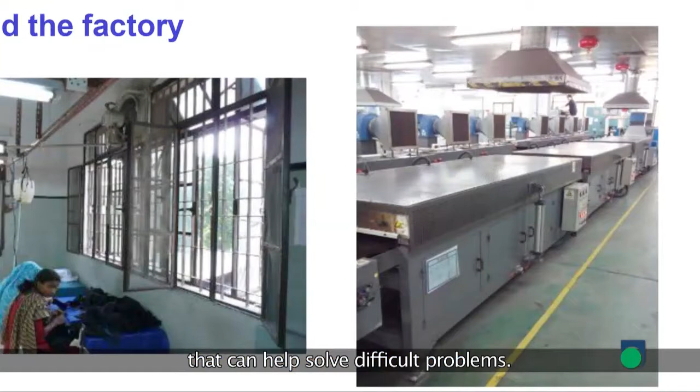The Open University of Hong Kong recently hosted an Earth Day summit. Political leaders, academics, and representatives of green groups and industries gathered to address a range of environmental challenges. In the following session, two green industry leaders presented practical solutions that can help solve difficult problems. First, engineer Chris Chong, Managing Director of Hong Kong District Cooling Company, explains how cooling buildings from a centralized source can save money and help reduce energy use and pollution.

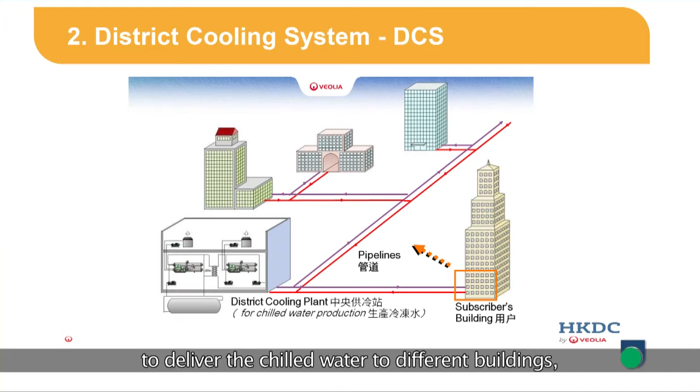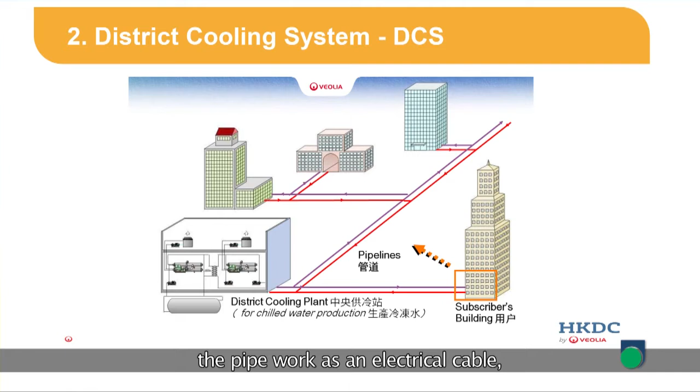So what is district cooling? It is in fact a centralized cooling plant, and then there is pipework delivering the chilled water to different buildings, and in each individual building, there is an intake room, or you call it a substation. So the concept is no different from power. If you consider the district cooling plant as a power plant, the pipework is an electrical cable, and the intake room is a transformer. It's the same. So we are basically transporting energy from one centralized plant to the individual users.

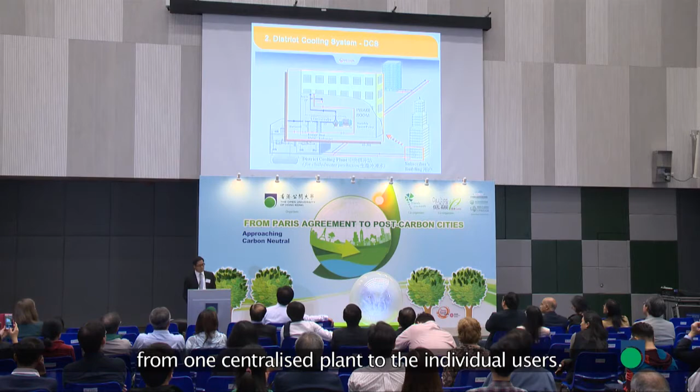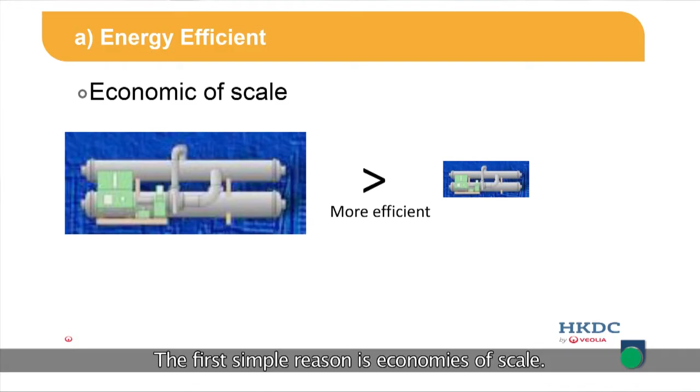So according to EMSD studies, district cooling is more efficient than fresh water cooled and also air-cooled chillers. And I'm going to explain to you why there's a saving because of centralization. The first simple reason is economies of scale. A big machine is more efficient than small machines. This is the reason why you don't have your own generator at home. You need a power plant. This is one of the major reasons.

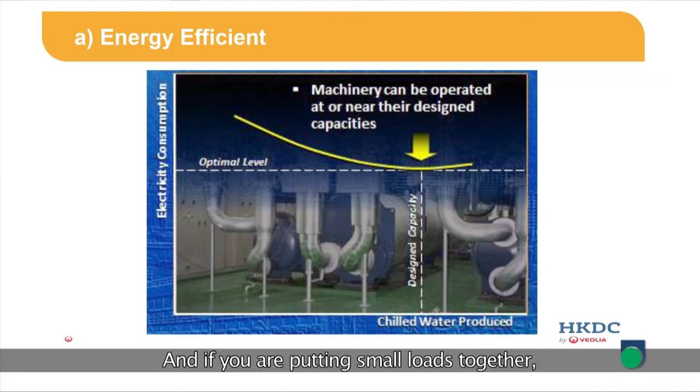And if you put small loads together, then you can operate the machines in an optimal way. If you only have one machine and one customer, you cannot manipulate the machines. But if you have more customers connected, then you can operate your machines at different loadings, and make sure they are at the optimal design capacity.

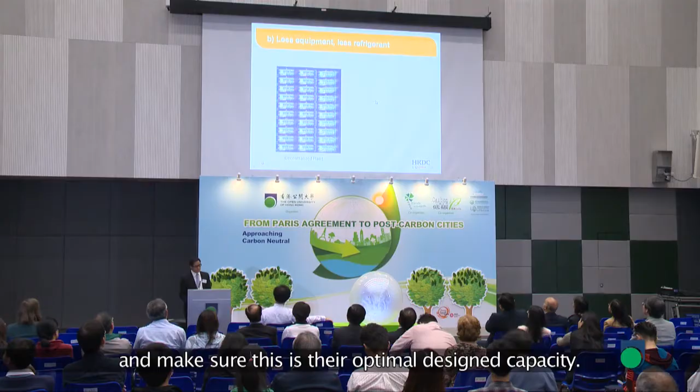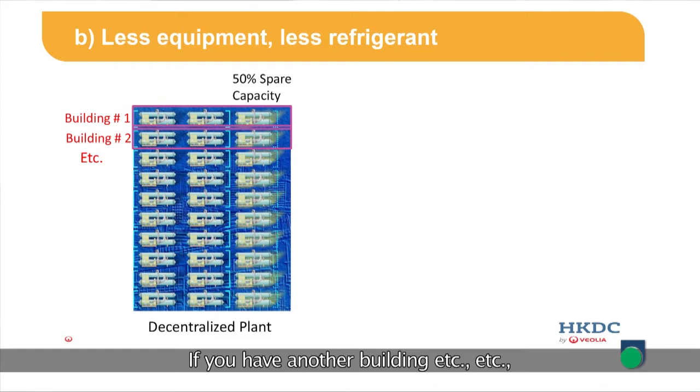Another environmental benefit concerns individual plants. For example, if you have one building, normally you have 2 units and 1 standby. You have 50% spare capacity. If you have another building, etc., that means the cumulative spare capacity is 50%. But if you have a centralized district cooling plant, I also need one standby, but that is 25%. By doing this, you can install fewer chillers. That means less refrigerant. That also helps the environment.

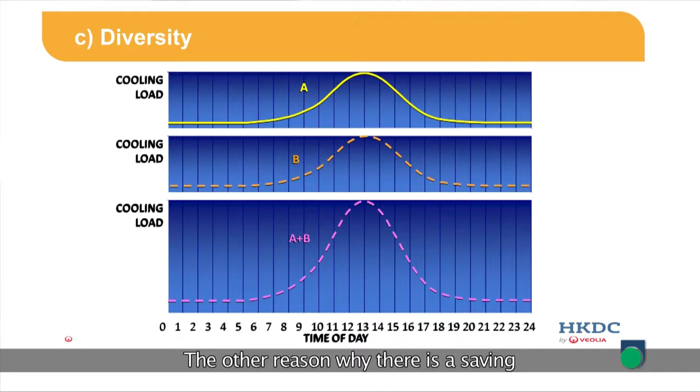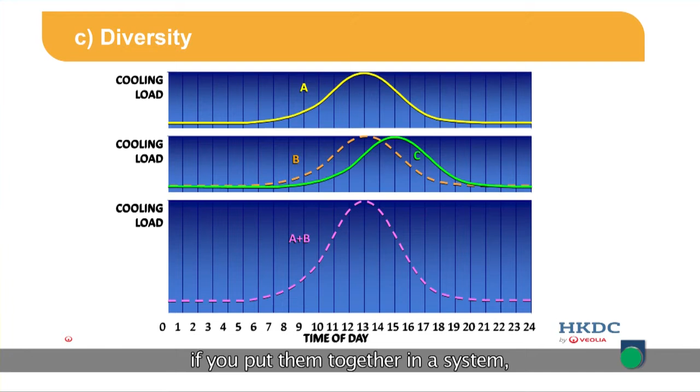The other reason why there's a saving from reduction in installation of the district cooling is if you have a building A and building B, they have the same pattern of usage. If you group it together, it will become A plus B. But if you have a building A and building C, if you put them together in a system, the cumulative loading will be A plus C. You can see the installed capacity can be less.

This is diversity. This is a common practice used in electricity. That means in the extreme case, there is say a nightclub versus an office. I can put one machine to serve both of them instead of two machines. This is an easy example to illustrate this idea.

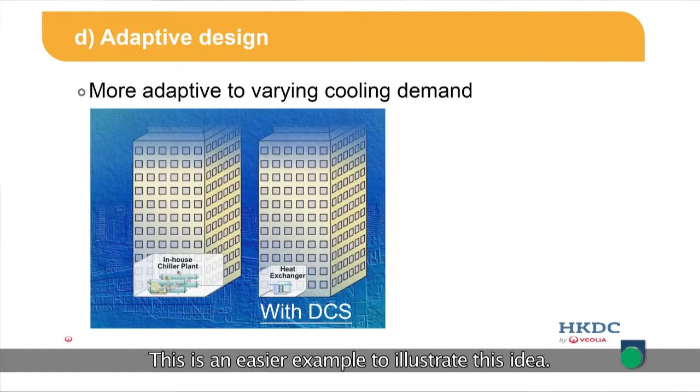The other way is district cooling. If you use this, just like electricity, if you want more loading or less loading, you just add more plates. It's more flexible. If you want more cooling or less cooling, we can just add more heat exchanger plates, then you can give more cooling to the customers.

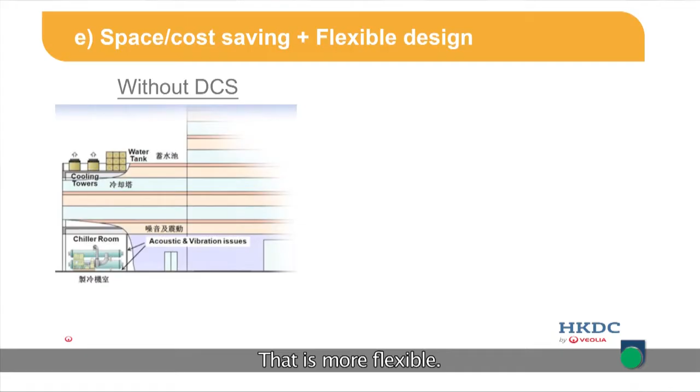That is more flexible. If you don't use district cooling, you will see you need to build your own chiller plant room. You need to build your own cooling towers. You need to build your own water tank. And there's something you cannot see, which is the electricity. 50% of the electricity in the building is used for air conditioning. You need to use the transformer house and also the switchgear room, which you cannot see here.

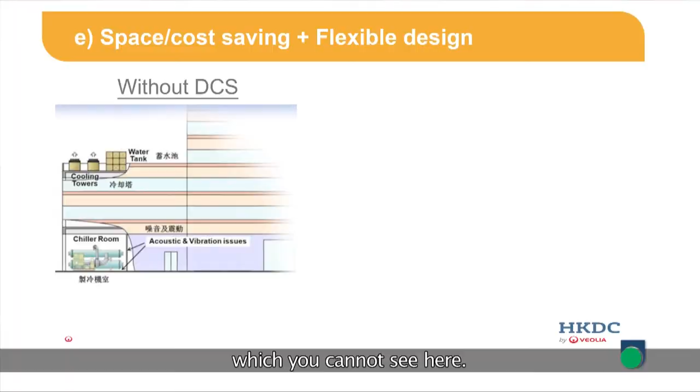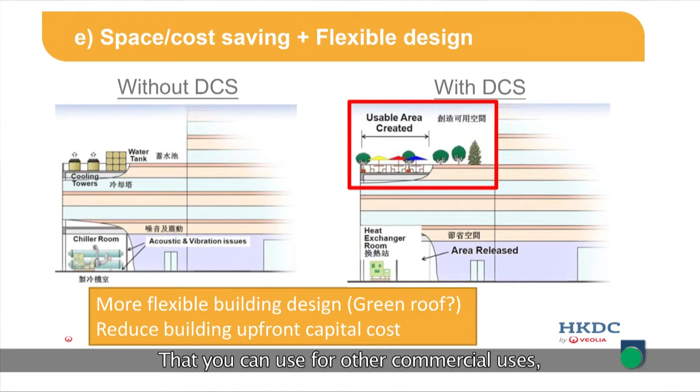But with district cooling, we only need a heat exchanger room. And for the area created, you don't need the cooling towers any more. You do not need the water tank. That you can use for other commercial use, or you can use a green roof or whatever you like. And also, you can save some area. The building can be designed in different shapes if you want.

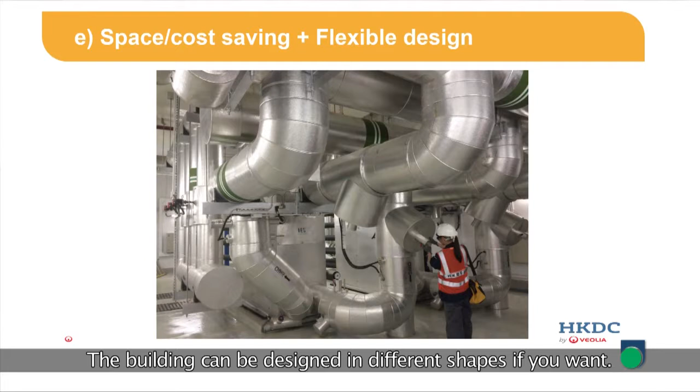This is the heat exchanger room for a 30-story building. In the past, you needed chillers, you needed a water tank, and now you only need a small substation like this, and it can serve a 30-story building.

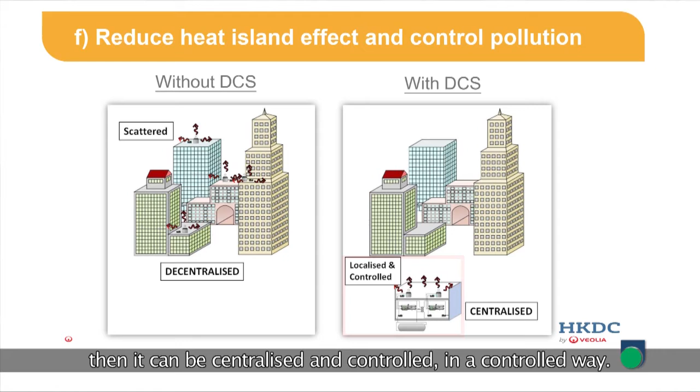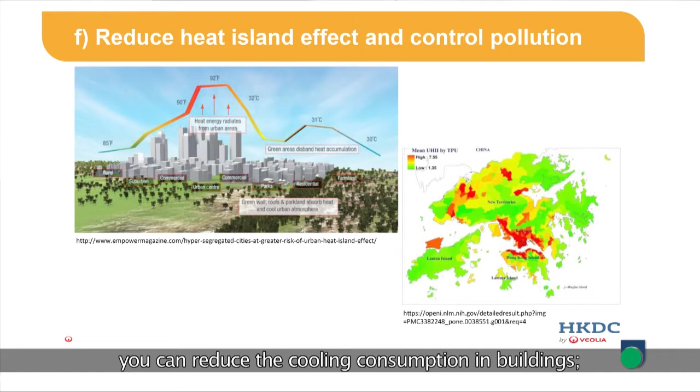Without DCS, you need to have your cooling towers, normally hosted on the rooftops of different buildings. But if you have district cooling, then it can be centralized and controlled. By doing this, it can reduce the heat island effect for the cities. As you can see, this is the case in Hong Kong. By reducing the heat island effect, it can reduce the cooling consumption in buildings. That also brings a good effect to the whole environment.

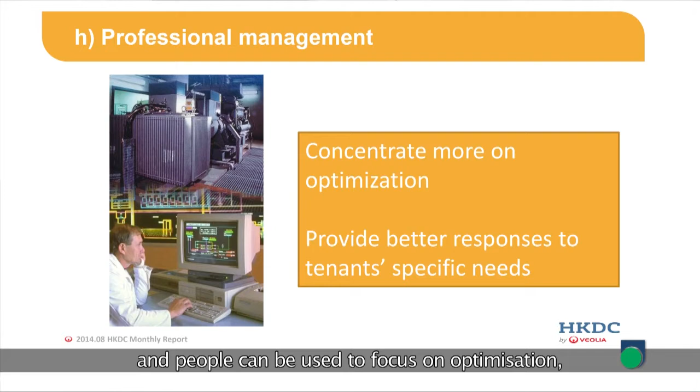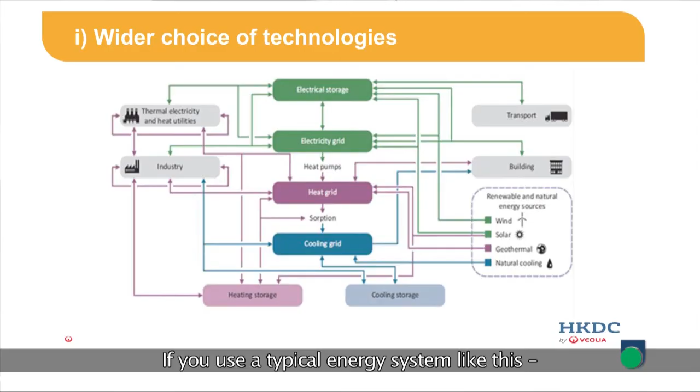And also, with a more centralized plant, you need fewer people. And people can focus on optimization, how to do it better. The coming slide, I think, for me is very interesting. Wider choice of technology. What do I mean? If you use a typical energy system like this, I will bring you through this. It looks complicated, but in fact, it is very simple.

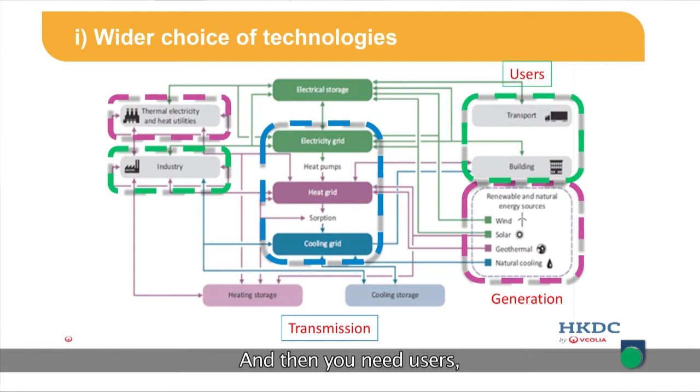You need generation, and you need a grid, like an electricity network or district cooling network or heating network. And then you need users, like transportation, buildings, and industry. And when you produce this, you can have storage. So I will explain why I bring this chart to you. I think this is an important concept of centralization. If you have only a small building, you cannot do this. But if you have a centralized grid, you can do this.

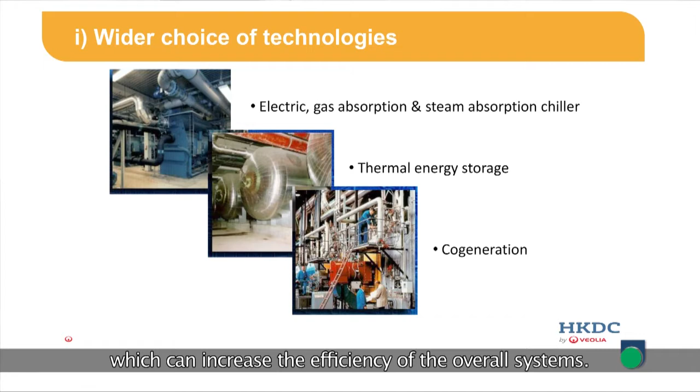In relation to cooling, for example, in your building, when you have the network, you can use different technologies like gas absorption chillers. You can use waste heat for the absorption chillers. You can use thermal energy storage. And you can use cogeneration, which can increase the efficiency of the overall system. And all this technology, you cannot do it if you have a small building. If you have the scale, you can employ all these technologies.

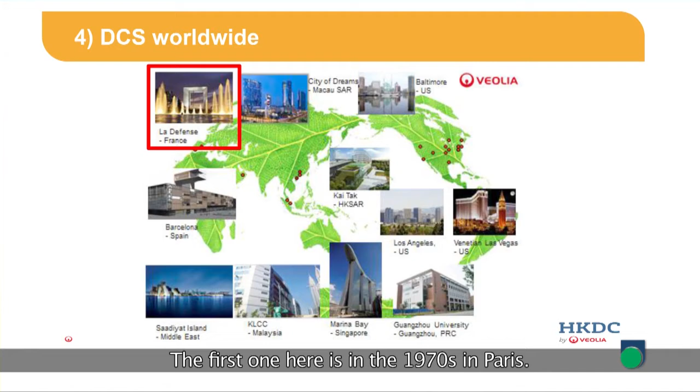What are the DCS worldwide? So Veolia has a lot of district cooling. We are the largest district cooling company in the world, and also in the US. There are a lot of different cases already done for district cooling. And the first one here is 1970s in Paris. There was district cooling already. So it is not new technology. It has been there for 40, 50 years.

So the project I work on is Kai Tak, the first public district cooling in Hong Kong. When this is fully built, it's 80,000 RT. What is the concept of that? A grade A building requires 3,000. Now it's 80,000. That means about 30 buildings, 30 grade A buildings, we can supply.

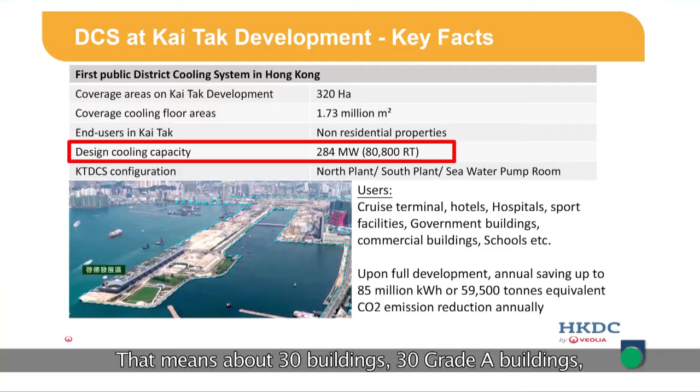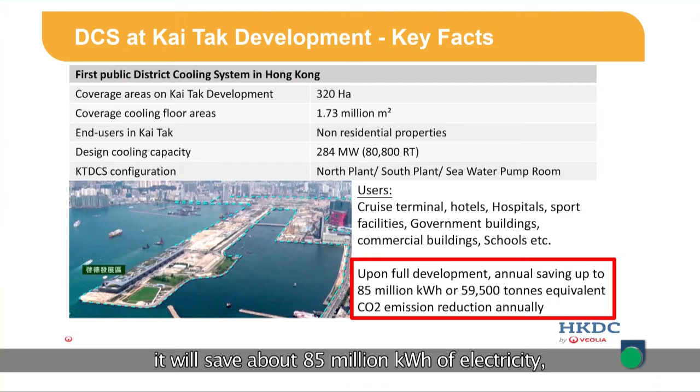And from the government studies, you can see we will have different types of users: cruise terminal, hotels, hospitals, government buildings, commercial malls. When fully done, it will save about 85 million kilowatt-hours of electricity, based on the reasons that I explained before. The project has been completed in phases. We have 2 plants, one north and one south. Some of the users are already using us, like the cruise terminal and also the T1 tower.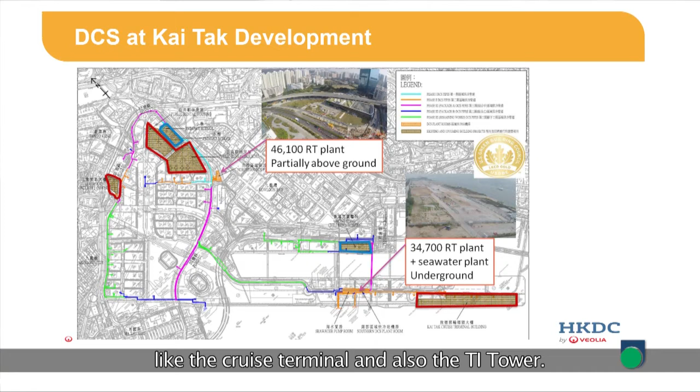One characteristic of this project is it uses seawater. Seawater has a lower temperature. If the condensing temperature is lower, the efficiency of the system is higher. And this is one of the good reasons that the government wants to use district cooling using seawater. And this technology is difficult to use if you have individual buildings.

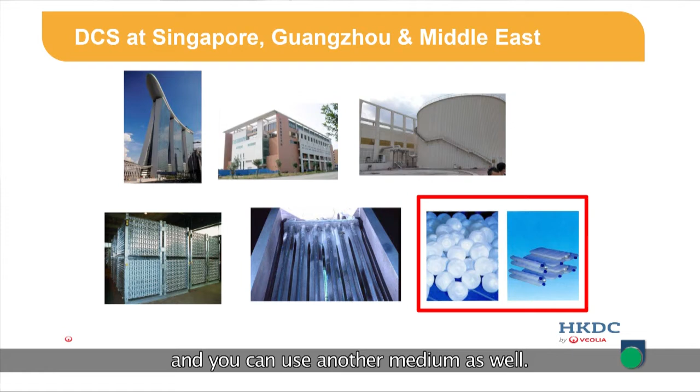Let's take a look at other places like Singapore, Guangzhou, or the Middle East. You can see there is big ice storage inside, and this is a chilled water tank. This is some kind of ice for the ice storage, and you can use other media as well. In this project, they use ice or cold water. And why do they do this? This is quite controversial, but I will bring you through this.

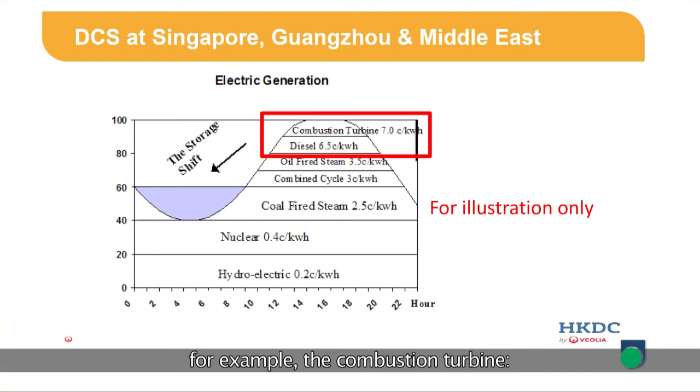This axis is the hours, and this is the percentage of the electricity loading. I'm from the power industry. When I was young, normally they used nuclear or hydro as a base load. When there is more electricity consumption, they put less efficient machines to serve the peak. For example, diesel. For example, the combustion turbine. The efficiency is lower, the cost is higher.

So for cooling in a typical building, this is also the hours. Normally we turn it on during the afternoon hours or the office hours. If we can find a way to move the cooling peak to nighttime, I think this is the reason for using ice storage. And why we do this in China, for example: in China, the nighttime tariff is only about 1/3, 30% of the daytime. I think the government also gives incentives for industry to move their afternoon peak to nighttime.

This is one effective way because cooling is a big user during office hours. And by doing this, they can depend less on the less efficient generation machines. And also, because you have storage of cooling, in case there's no electricity, you can still have some cooling because you have ice. That is a very important concept. If you look at it from the city's perspective, it can reduce or defer power infrastructure development.

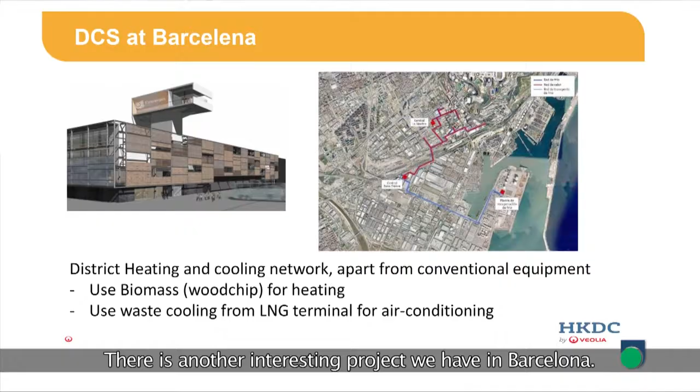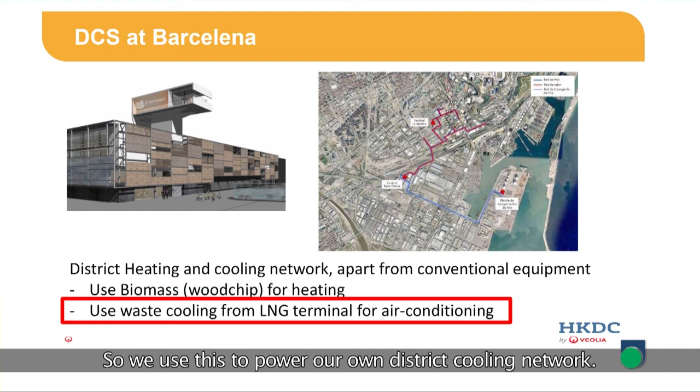There's another interesting project we have in Barcelona. This is a district heating and cooling plant. For the heating, they use wood chips for producing heating for the customers during winter. What's really interesting is they use the cooling from the LNG terminal. You know LNG is minus 165 degrees. When they regasify it, there is a lot of free cooling. In this project, we use the free cooling from the LNG. If we don't use it, it will be dumped in the sea anyway. So we use this to power our own district cooling network.

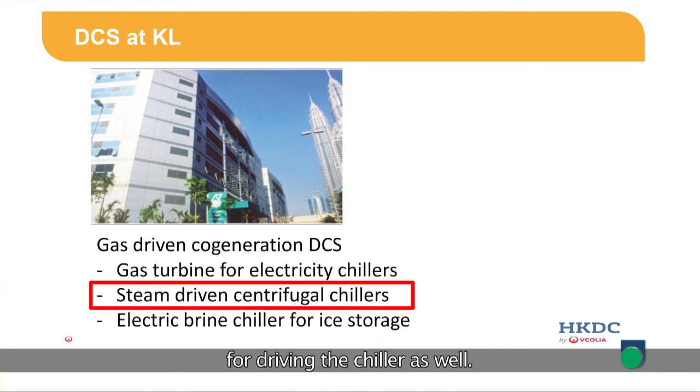And there's another interesting project we have in Kuala Lumpur. It's a gas project. It uses a gas turbine to produce electricity to drive the electric chillers. And they use the waste steam for driving chillers as well. They use steam-driven centrifugal chillers. They don't use motors; they use the waste steam to drive the centrifugal chillers. And if you know electricity well, a gas turbine needs a stable load. That means at nighttime, when consumption is not high, we use the electricity to produce ice. That makes the system more efficient.

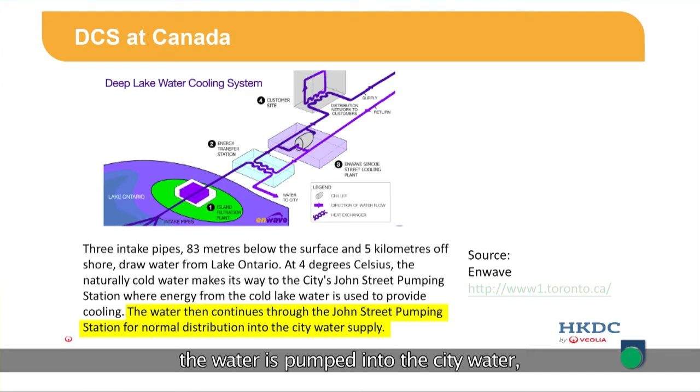The interesting point I would like to highlight is, after this process, the water is pumped into the city water supply. So it's not waste. You pump the water anyway and take the cool to power the whole city. I think this is a very good idea.

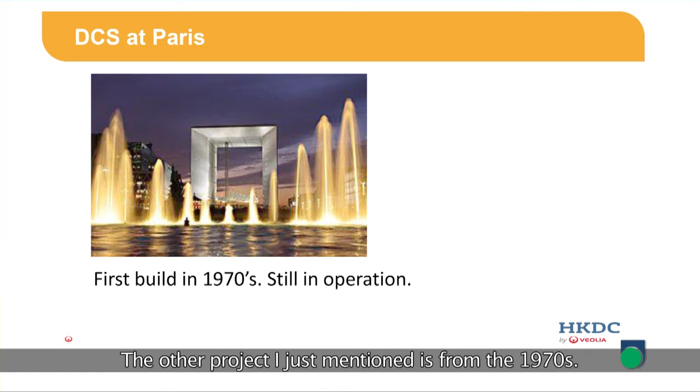The other project I just mentioned is from the 1970s. It has been built for a long time, so it's a very proven district cooling system in the world.

After saying all this good thing about district cooling, I need to caution a bit. When we build district cooling, we need to think about the tunnel, the planning of the pipework. That needs to be done carefully.

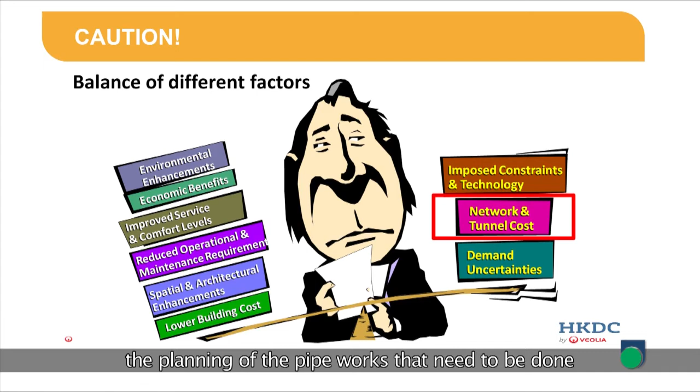Apart from that, demand uncertainty is something we need to think about, because we are an infrastructure company. If we build it and there are no users, we will lose a lot of money. We need to make sure it makes economic sense, otherwise it will scare off investors.

As a conclusion, after saying all this about district energy and district cooling, this idea is confirmed by the United Nations Environmental Program. They issued a book called District Energy in Cities: Unlocking the Potential of Energy Efficiency and Renewables. It states that a district energy system is the best practice approach for providing a local, affordable, and low-carbon energy supply.

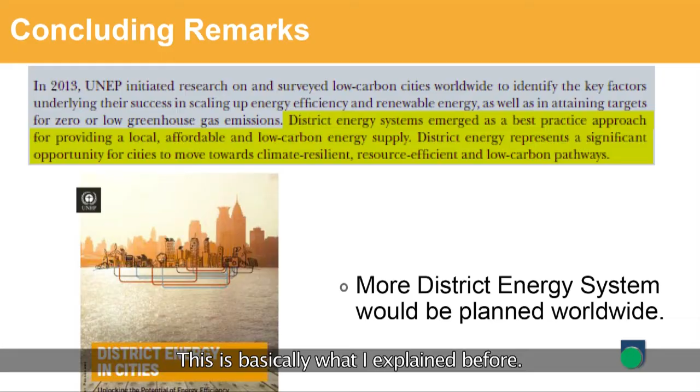District energy represents a significant opportunity for cities to move towards a climate resilient, resource efficient, and low-carbon pathway. That's basically what I explained before. I think it's a good concluding remark for my talk.

Last but not least, I want to say again, the green economy will be an economy of innovation. We need your help to reduce the carbon footprint. So this is the end of my presentation. Thank you.

In the second presentation, Professor Engineer Steve Wong, Managing Director of Billion Group Technologies, recounts some of his experiences with improving industrial design in ways that cut energy usage by startling amounts.

First of all, thank you very much for the invitation by Professor Casey Ho and the organizers, so that I have the opportunity to share my humble experience in energy efficiency improvement and also waste-to-energy experience over the last 2 decades in Hong Kong, China, Asia, and also Germany and Europe. I would focus on 2 things: energy efficiency and waste to energy.

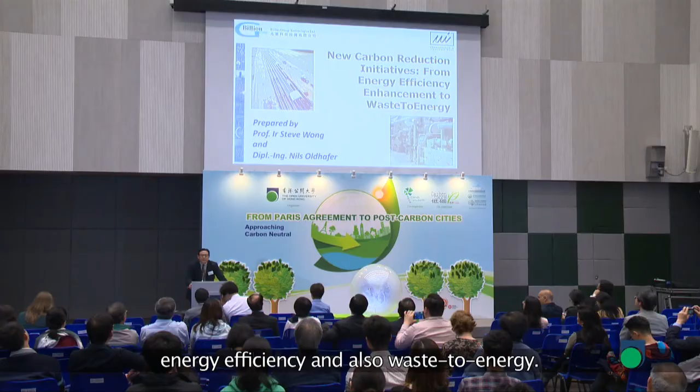Before I start sharing my experience, let me ask you one question. When we always talk about carbon emission, we always compare the current carbon emission or greenhouse gas emission to the pre-industrialization level, am I correct? Why do we always compare carbon emission to pre-industrialization? The answer is, we think all the carbon emission is coming from industrialization, am I correct?

Then I ask one question further: why does industrialization cause so much carbon emission? We know the answer - carbon emission is caused by industrialization. But why does industrialization cause so much carbon emission? The answer is low energy efficiency.

I'm not talking about theory, I'm talking about my actual experience over the last 2-3 decades. I've been helping a lot of industries - injection molding, electroplating, metal stamping, cement, asphalt, electronics, toys, dyeing, whatever you name it. I've been working in the last 2 decades for various industries in Hong Kong, China, and the Asia region. Out of this analysis, we found that most manufacturing facilities' efficiency is extremely low.

If you ask me, 'Hey Steve, what is your summary of those industries when they have employed your expertise to improve energy efficiency, what energy saving could be achieved?' From my last 20 years of experience, after my assistance with the manufacturing process, on average, the energy consumption could be reduced by 50% or even higher.

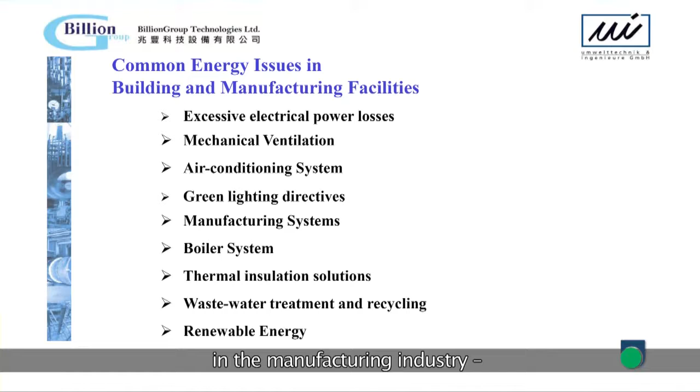I will share some of my experience in the specific areas where most industries have been wasting energy: electrical power losses, mechanical ventilation and air conditioning systems, lighting solutions, mainly in manufacturing systems. Particularly in China, I think most energy is being consumed in manufacturing industry - boiler systems, thermal insulation systems, wastewater treatment, and renewable energy.

For example, I'll give you some information. Hydropower is a green energy, right? If total hydropower is 1 unit, do you know how many units are available for solar power? For renewable energy, we have wind energy, biogas, whatever, but the most available renewable energy among all is solar. Comparing the magnitude, if 1 unit is from hydropower, how many units are available from solar?

Anybody know the answer? The answer is 2,850, according to the global survey. Therefore, the most abundant and available renewable energy on earth is solar energy. This is why we should make use of solar energy.

Maybe I can highlight some of my experience regarding the shortcomings coming from the industry in the last two decades.

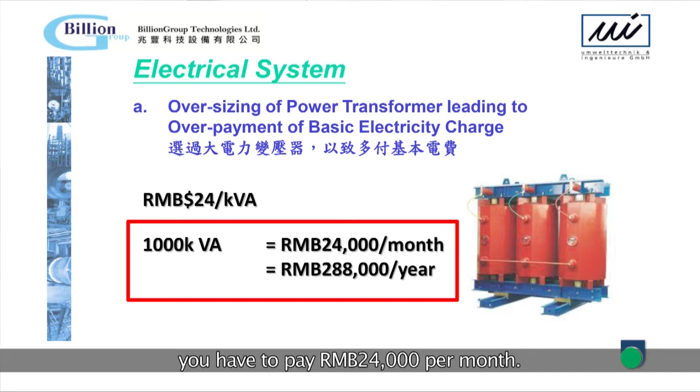On the electrical system, a lot of factories are over-providing the supply capacity in their factory. Financially, they spend too much money because when you install a transformer, no matter whether you use it or not, installing a transformer around 1,000 kVA costs around 24,000 RMB per month, which is almost 300,000 every year. Therefore, I've seen that a lot of factories over-provide the power capacity at their sites.

That's number one. The second thing is that even though you idle this power supply in the factory, it's still consuming energy, because it will consume hysteresis loss in the core of the transformer. This is why we always advise our clients not to overbuild the power supply system in their factory, particularly as in the coming years, when we apply energy efficiency improvements across various energy systems, overall energy consumption will come down drastically.

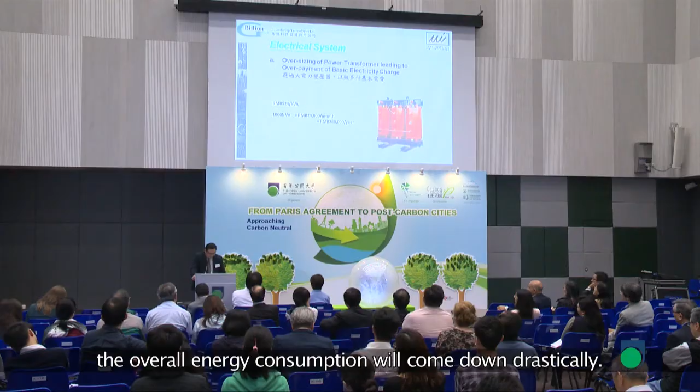Then for the electrical system, a lot of loss is consumed in power distribution. I had a factory ask me to be their consultant in Dongguan. In one single year, we helped them save energy worth around 30 million RMB. You can imagine how much energy they had wasted. One of the most significant wastes is in power distribution, not outside the factory, but inside the factory.

Because they only installed the capacitor at the main board. Installing a capacitor at the main board is good for power distribution, but only from the perspective of the supply company. There's no internal benefit. Therefore, once the client adopted my advice to install power factor correction at the load center, they could immediately save a lot of energy running from the main board to the load center.

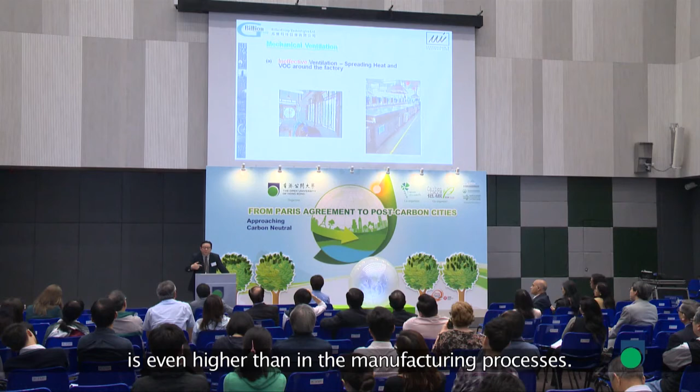In most industries, they install mechanical ventilation. In the mind of most factory owners, a ventilation fan is just small power, so just let it run. But in reality, in some factories and workshops, I found that the energy consumed by the ventilation system is even higher than that of the manufacturing processes. That's the fact. Therefore, after refining the ventilation design, a lot of energy consumption has been saved.

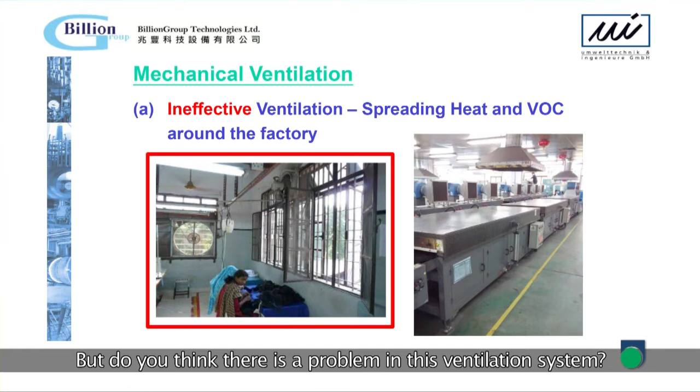On the left-hand side, this picture is of a very famous factory in Bangladesh. I help a lot of factories in Bangladesh. Before my help, I found that they were running a lot of ventilation fans. But do you think there's a problem in this ventilation system, or is this system good? What's the reason? Short circuit.

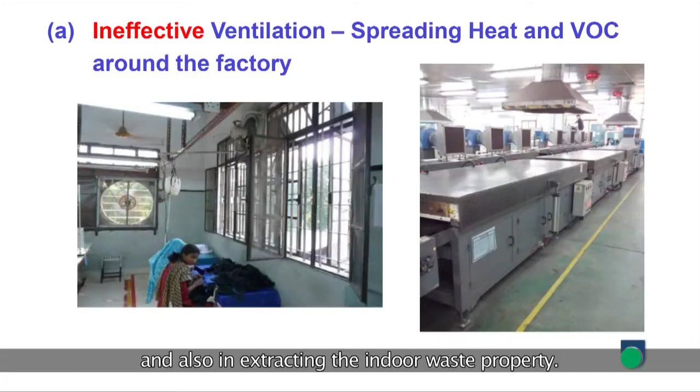This factory owner is quite generous in using money and energy running ventilation fans. But once the window is open, actually all the air comes up from the window directly to the outside. There's no effect in cooling down the indoor temperature, or in extracting the indoor waste heat. Therefore, after a good redesign, the whole system improved and energy consumption was drastically reduced.

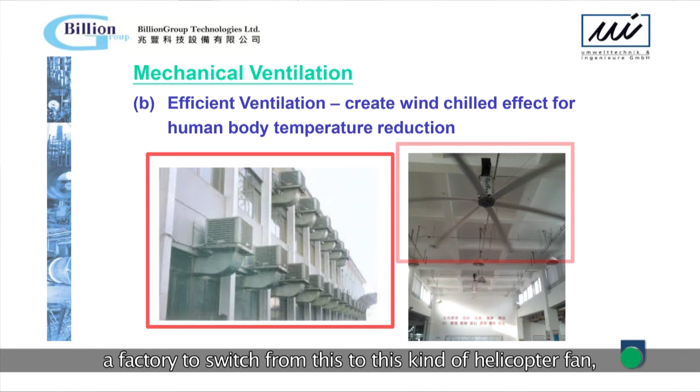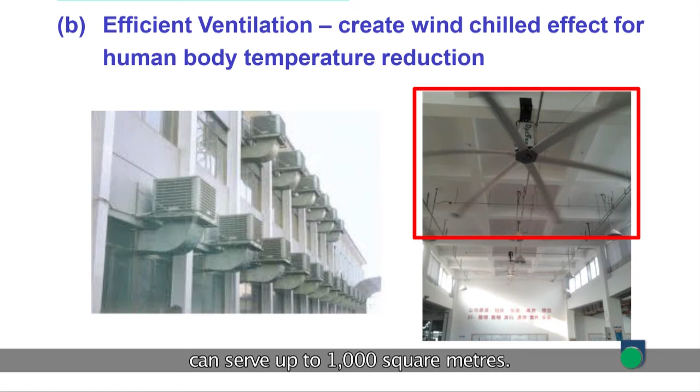50% is not an extravagant figure. In China or in Asia, a lot of this kind of evaporative cooler has been used. But nowadays I highly recommend factories switch from this to this kind of helicopter fan, because an evaporative cooler consumes around 1 to 2 kilowatts of power, but the area it serves is quite limited, only around 1,000 square feet or less. This kind of helicopter fan can serve up to 1,000 square meters, and the power consumption at the optimum running condition is only 1.5 kilowatts - we actually measured the consumption. Therefore, we can drastically reduce the power consumption in ventilation by over 50%.

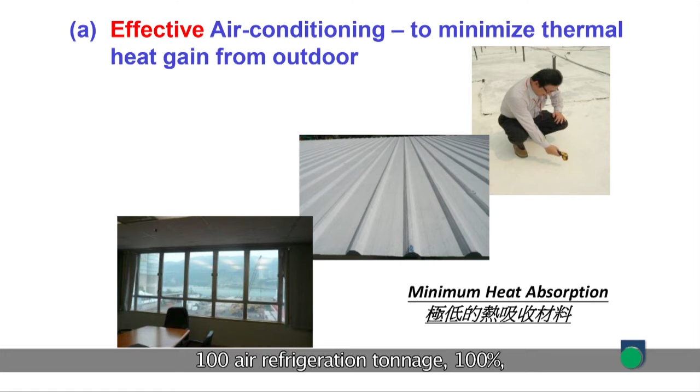In air conditioning, from my humble experience, most of the saving in air conditioning is not in the air conditioning system itself, but in the building envelope. For example, for a building with a cooling load of around 100 refrigerant tons, taking that as 100%, you can guess how many percent is for catering to internal people, and how many percent is for catering to external heat gain.

Maybe I'll ask this question in a way: is the majority of cooling load for cooling down internal heat gain, or for cooling down external heat gain coming into the building? External - raise up your hand. Exactly right. I can share with you that sometimes up to 80% of the refrigerant loading is running to cool down the heat gain from the outside.

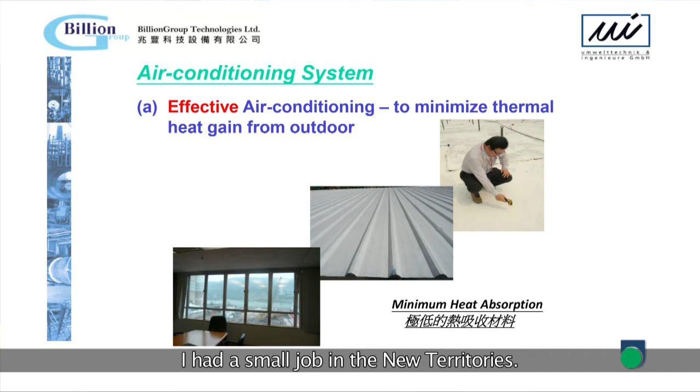I had a small job in the New Territories. After improving the thermal treatment for the building envelope, for the air conditioning systems, we could switch down 3 units - only 1 unit running. We saved 3 units. You can imagine how much energy was wasted before the retrofit. Therefore, starting from now, in order to increase energy efficiency and maximize the usage of our energy, we have to bear in mind looking at the building envelope of our premises, and try to eliminate or avoid any energy wastage in cooling down the external loading.

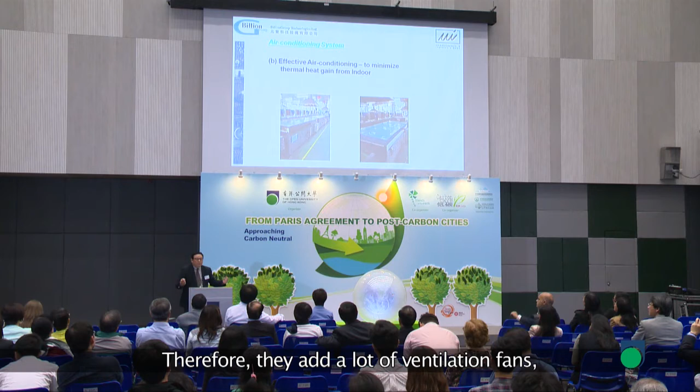In some manufacturing systems, a lot of bad design exists where the indoor temperature is very hot. The owner of the factory is good-hearted and passionate about the workers, so they add a lot of ventilation fans here and there. For example, the heat source is right here, and they install a lot of fans in the perimeter of the building so they can expel the heat out to the outdoor atmosphere. Is this a good exercise?

No. One thing is that the heat source is right here, and if we install the fan over there, we are trying to move the heat and spread it around the whole factory - that's point number one. The second point is that normally during manufacturing processes, apart from heat, what do you produce? Pollutants - VOCs, am I correct? If you install such a system at that location, you are pushing the pollutants from here all around the factory, and all the workers inside are being exposed to dangerous pollutants or dangerous material. Therefore, it is not a good design.

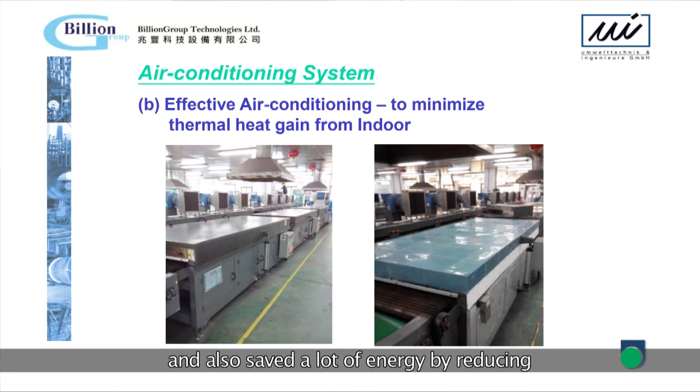The best design is that when you create pollution at the source, you have to remove the pollution right at the source - am I correct? This is the right solution. After using this kind of approach, we have helped a lot of factories improve indoor air quality and also save a lot of energy by reducing and shutting down all these perimeter ventilation fans.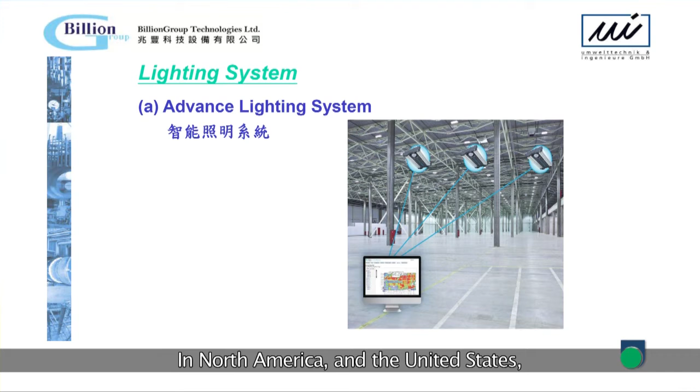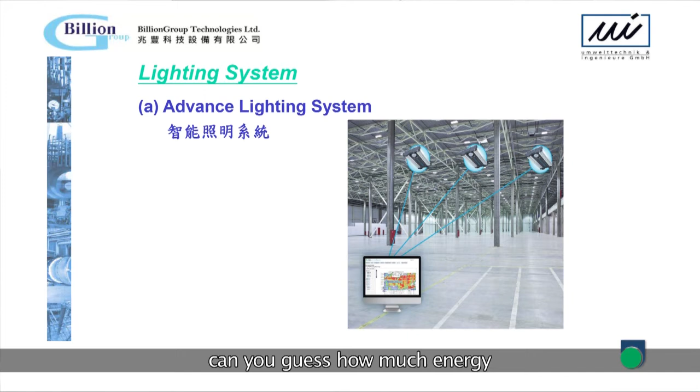Lighting systems normally constitute around 10% of the total consumption in a factory. In North America, the United States, and Europe, over the past 5-6 years our team has helped a lot of big factories reduce energy consumption in lighting systems, including Coca-Cola, Pepsi, Kellogg, and others. After using the latest advanced lighting system, how much energy do you guess we can save? 10%? 50%? 90%? 95% maximum, on average 90%.

Therefore, I think we have to look at whether we are wasting energy in the lighting system. Apart from light source - T8 to T5, T5 to LED - there's only one element in energy saving for lighting, which is the light source. But in reality, a lot of simple things can be used to reduce energy consumption in lighting.

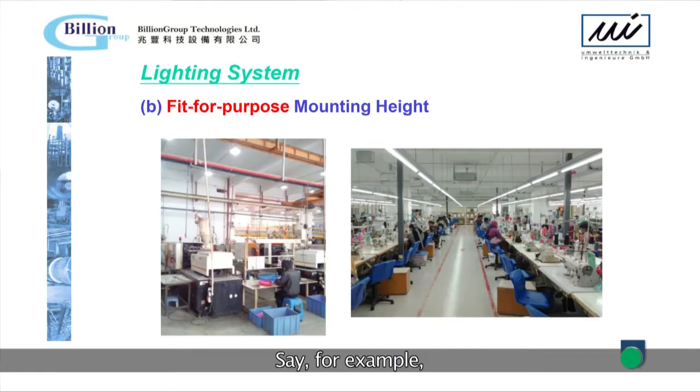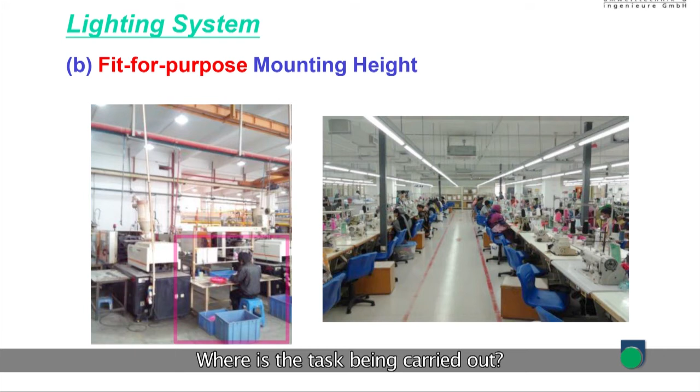For example, in this factory the lighting is at the ceiling of the plant room. But where is the task location, where the task is being carried out? Down on the floor, am I correct? If you put the lighting on the top floor, you will waste a lot - even though the lux level there will be 1,000, down on the floor it's only 50. Therefore, you're wasting a lot of energy illuminating the area beyond the task area. Back to this picture, all the lighting was at the ceiling, but after my redesign of the system, they put all the lighting just on top of the sewing machines. By doing so, you could save more than 50% of the energy.

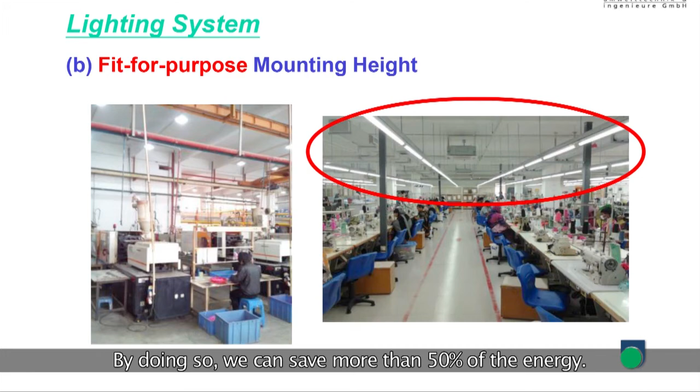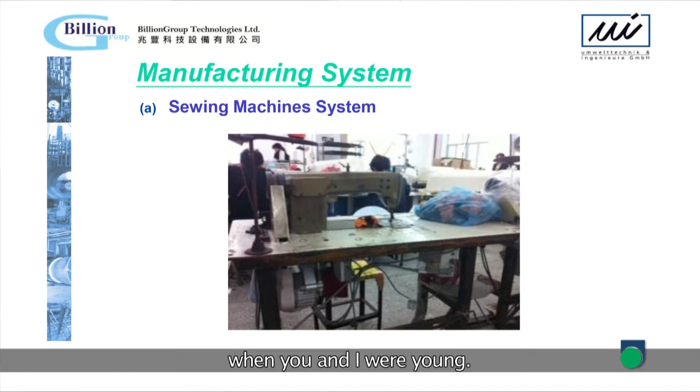For manufacturing systems, we've done a lot of examples like this. For sewing machines - I think you remember these sewing machines from when you and I were young - they're still being used in some countries, particularly developing countries. After improving the sewing machine's efficiency, we could also save 60% in energy for the sewing machine. Then after applying energy efficiency measures, the overall saving could be over 50%.

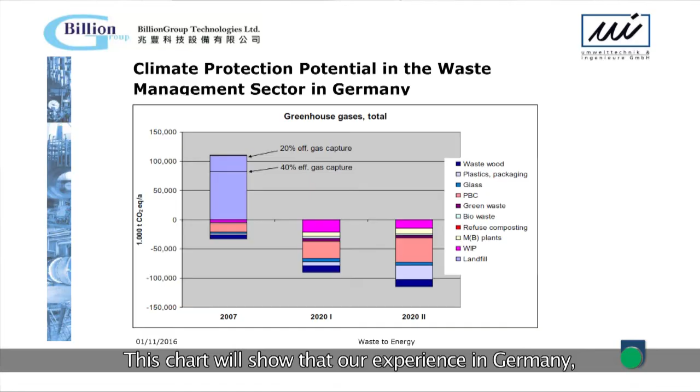Then talking about switching to waste treatment - this chart shows our experience in Germany after adopting proper waste treatment, where the total CO2 emission, the carbon emission, can actually be reduced.

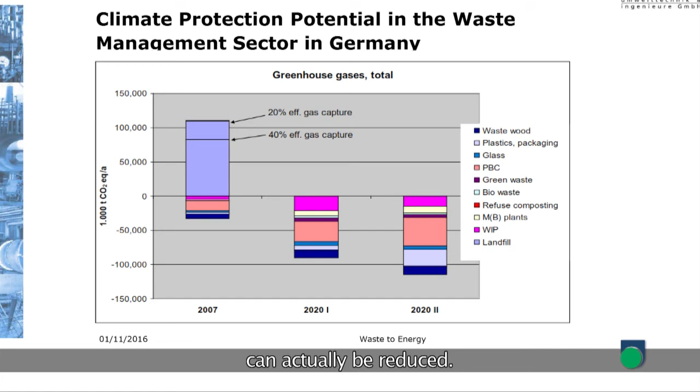In China, there are around 660 cities at the moment. How many cities are being surrounded by garbage, municipal solid waste? Do you know the number? The answer is 440.

440 cities being surrounded by garbage, municipal solid waste. This waste has generated a lot of pollution in air and water, deteriorating the health of the people. Therefore, we have an imminent need to solve this waste problem in China. This problem is not unique to China, but also affects most developing countries in Asia.

I'll introduce a concept because in China, they do have waste-to-energy plants, but the problem is they directly fire the waste into steam. Bear in mind, most of the waste in China has very high water content. Do you know how high? In monsoon season, up to 80% moisture content. Normally also 70%. If you fire this waste in an incineration plant, you're actually firing water.

The energy efficiency is very low. Once you fire this waste, the temperature of the burner will be around below 1,000 degrees Celsius. If that happens, one significant drawback is the generation of dioxin.

In Germany, starting from 2005, the EU and Germany had to follow the EU legislation that no untreated waste can be dumped into landfill sites. Since 2005, no untreated waste could be dumped into landfill sites. That means all waste must be treated well before the landfill site.

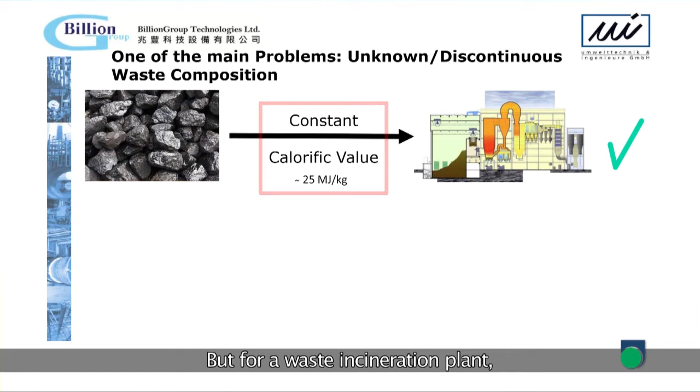But for a waste incineration plant, the value is not constant across different timelines in a year. Like Chinese New Year, Easter holiday, summer or winter time, the composition of the waste is different. Therefore, the calorific value of the waste is different. How you build a waste incineration plant to cater for different C values is extremely difficult, and the efficiency will be very low.

One more important point: in designing a waste-to-energy plant, are you running it for 1 year, 2 years, or 3 years? Of course not. It must be running for the coming 25 years or even longer.

Am I correct? But in that case, bear in mind the demographics of the city and the economic situation of a city will change. That means the economy will change the city's behavior. In that case, the composition of the waste of a city will also change, and the C value will continue changing. How do you design a plant to cater for all these changes?

Therefore, if you strictly design a plant just mainly for waste-to-energy, the plant will come out with very low efficiency. That's what we have seen in China right now.

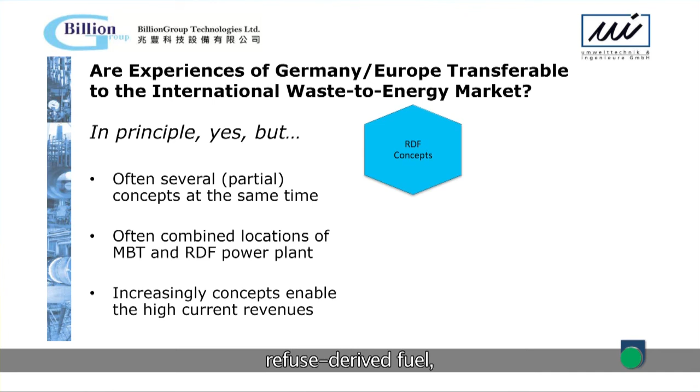How to tackle this problem is that we can apply a treatment called MBT to change this waste into a green fuel called RDF, refuse-derived fuel, in such a way that this RDF can have a very high heat value, C value, up to 12 megajoules per kg. That's proven. And this RDF also can have a lot of applications.

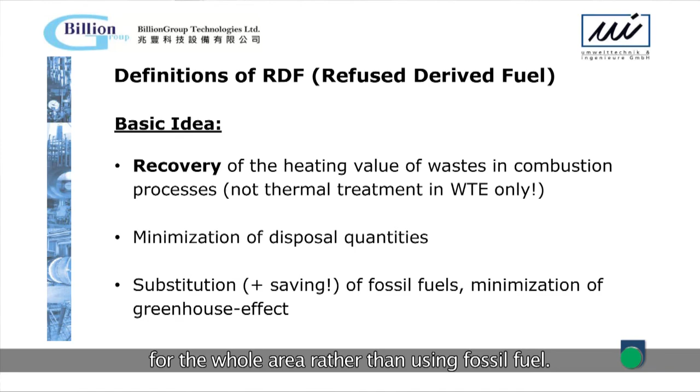In Germany, we always build the RDF plant next to the paper mill or industry. Therefore, we can directly use the heat generated to feed the industrial process. Then you can save a lot of energy.

These are the CO2 emission reductions through using RDF. You can compare brown coal, hard coal, oil, natural gas, and RDF. You can see that the CO2 emission is lowest from RDF.

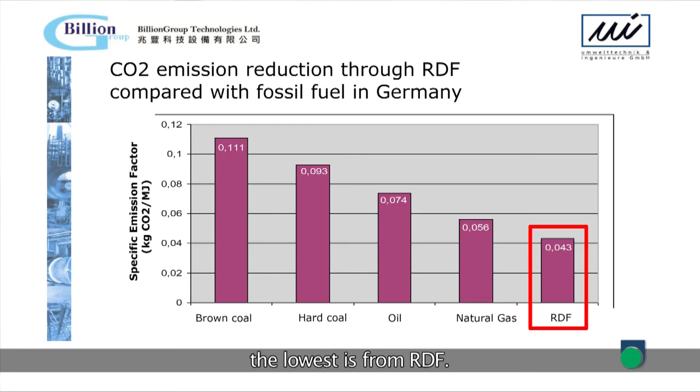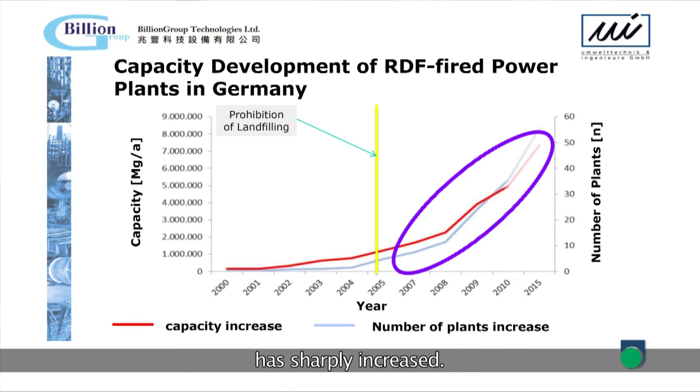This is a chart I wanted to highlight. This is the year 2005. After 2005, you could see the numbers of RDF-fired power plants in Germany sharply increased. The reason behind this is that without the policy of the government and the EU, there would be no such consequence.

In order to move to a greener life and help our environment, we need our government to legislate policy to reinforce more greener energy like RDF. Thank you very much.